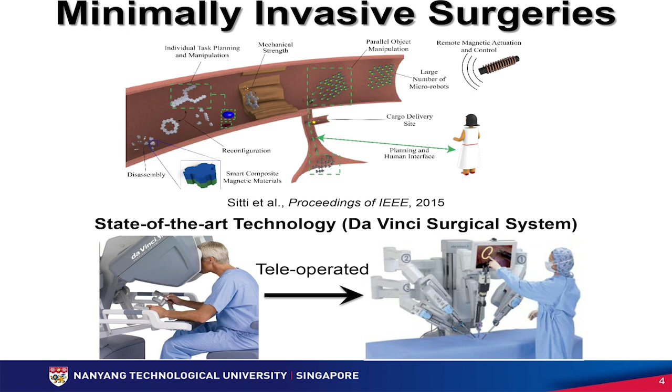A very unique characteristic about this class of robots is that they can utilize their size and mobility to non-invasively access highly confined and enclosed spaces to perform a wide range of micro-nano manipulation tasks. Due to this ability, scientists envision that this technology could one day revolutionize minimally invasive surgeries. The dream is that one day we can inject all these robots into our body, navigate them to a targeted location in a non-invasive way, and perform treatments.

The potential impact of this technology is very significant because if we compare it to the state-of-the-art technologies that use tethered catheters to perform minimally invasive surgeries, the small-scale technology has two distinct critical advantages. Number one, due to the size of the robot and its mobility, the treatments that it can give will be much less invasive. So what does it mean? It means that the patients will experience less pain and they can also recover faster. The entire procedure will also become safer because you reduce the risk of infection and also mechanical trauma.

Point number two, once again, because of the size of the robots and the mobility, they can actually access places that those tethered catheters could not reach, which is why having higher accessibility enables them to create and enable unprecedented new treatments in the future.

So heading towards this goal and dream, many miniature robots have been created in the last decade. In general, we can classify them into two categories, the rigid ones and also the soft ones. After working on this research for many years, I conclude that the rigid ones could only achieve simple rigid body motions and nothing else, which is why I started to look more at the soft robots.

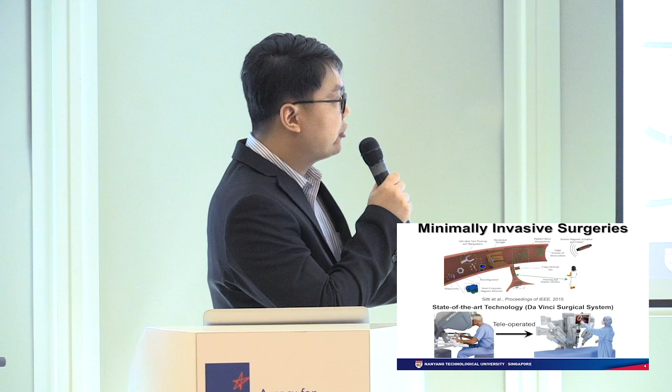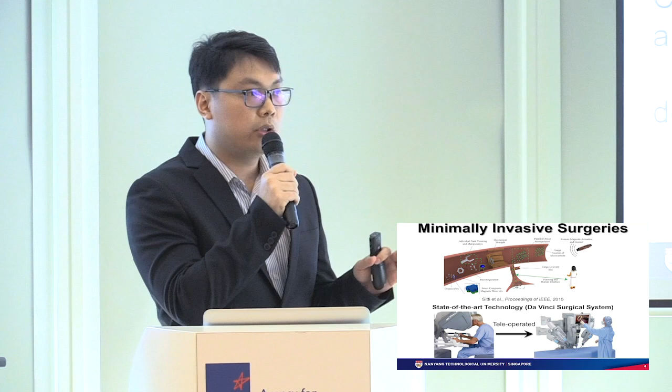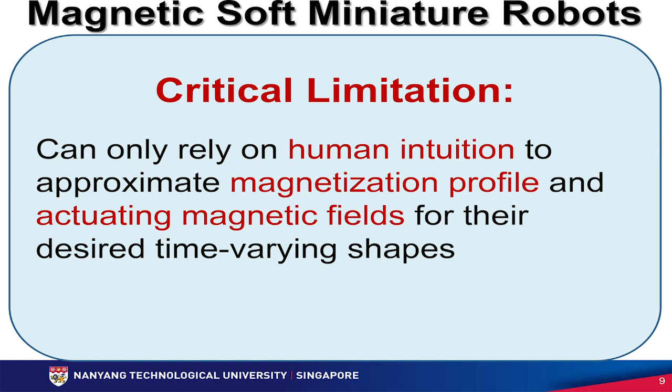Despite the potential of this technology, I need to highlight that there was a very big critical limitation, and that is people could only use their human intuition to guess the required magnetization profile and magnetic fields such that they can create the desired time-varying shapes to achieve certain functionalities.

And this is a very big obstacle if we really want to develop such a technology and translate it for biomedical purposes. And one of the big challenges, why they cannot develop a very systematic way to design and control such robots, is because we don't really understand the physics behind it.

So, in view of all these challenges, I'm going to propose a universal design method. The objective of this method is that if I'm given a series of time-varying shapes, we can use our method to allow computers to automatically generate the required magnetization profile, M, and also the required magnetic fields, B, to control the robots.

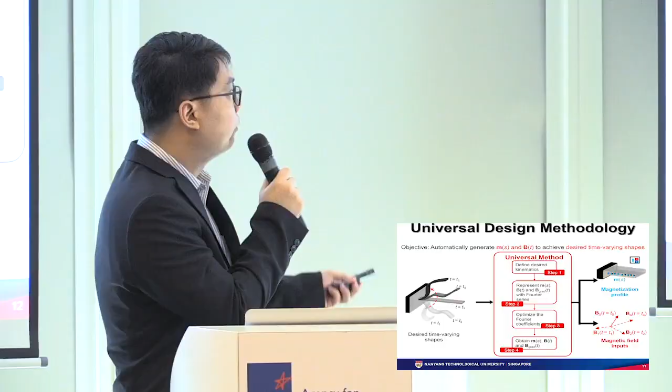So there are 4 steps in this universal method, and I'm going to use a simple beam to illustrate all these 4 steps. We start with step number 1. We are going to first define the desired kinematics, that means what kind of time-varying shapes we want. We can do so by first defining a parameter we call theta, which represents the rotational deflection of the beam at any point in space, S, and also at any time, T.

Once we define theta, we will perform a quasi-static analysis on the beam. To make the analysis generic, we will pick an arbitrary time instant T and an arbitrary infinitesimal small element, and look at all the forces and torques acting on this element. The forces and torques acting at the ends represent the internal forces and torques, while the forces and torque acting on the center represent the magnetic torque and forces respectively.

Once we have drawn all these forces and torques, we will perform a force balance analysis in the x and y axis for this element. We get the expressions shown over here. Next, we use the Euler-Bernoulli equation, relating the bending moment Mb with how the robot is going to deform. Finally, we perform a torque balance equation for this element, and substitute all these three expressions into that equation.

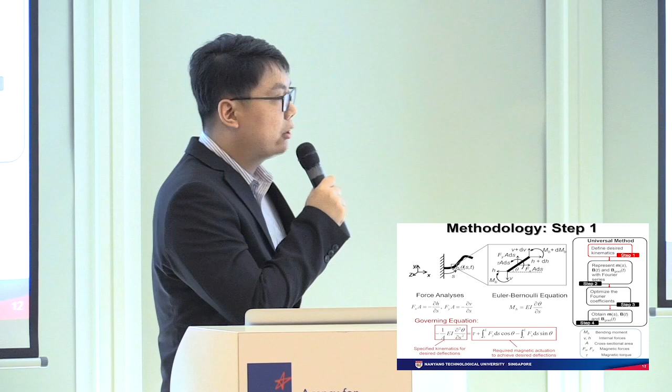What we finally get is a governing equation, the physics that really describes how this technology can work for this beam. There is a physical meaning behind this governing equation. The left-hand side represents the desired kinematics that we want the robot to do, the desired time-varying shapes that we want the robot to create. This is something that we specify.

The right side represents the required magnetic torque and forces that we need to program such that we can balance both sides of the equation. If we are able to balance both sides of the equation, it means that we are able to design and control the robot to achieve its desired functionalities. So this is step number one.

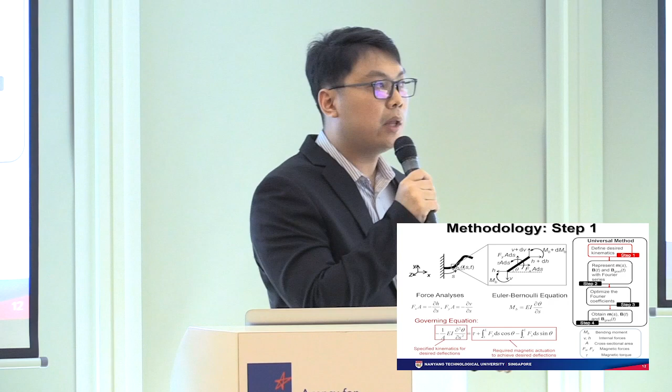Next, we will use this governing equation that I rewrite over here, and move to step number two. Before we do so, I would like to show you the explicit representation of how the magnetic torques and forces relate to the magnetization profile M and the magnetic fields B. Unlike traditional methods that use human intuition to guess M and B, here we are going to use Fourier series to represent M and B first.

The difference between these two Fourier series is that we assume that M, which is the magnetization profile, could only be a function of displacement or space, S, but not time. The reason we do so is because we assume that once the magnet has been magnetized and deployed, we cannot remagnetize it again. On the other hand, B can change across time. That means magnetic field can change across time, but we cannot change it in space because the size of the robot is too small for us to do that. So these are practical constraints that we will consider when we are trying to design and control them.

Nonetheless, despite these constraints, a very significant advantage of using such a representation is that the Fourier series representation includes and encompasses all possible solutions. That is why, if our time-varying shapes that we specify are feasible, we can always substitute such a representation back into the governing equation and balance both sides of the equation by finding the optimum Fourier series coefficients A, B, alpha, and beta. So we will need to go to the next step to show how we do this.

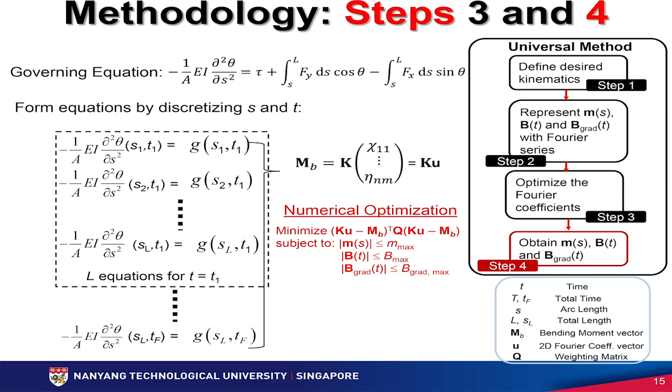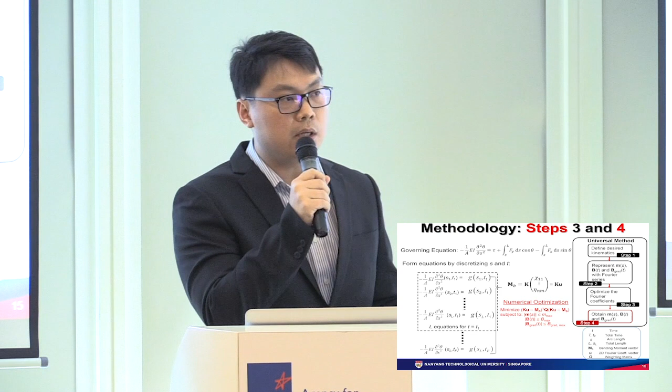So using this format, we'll go to step number 3, whereby we formulate an optimization problem. The aim of this optimization problem is to minimize the differences between the left and right-hand side of the equations by finding the optimum Fourier series coefficients. We also make some constraints because of practical reasons. We say what is the maximum amount of magnetic field we can supply to control our robot. So once we specify this optimization problem, we allow computers to automatically generate the required Fourier series coefficients. And this will in turn give us the required M, the magnetization profile, to design our robots, and also B, the required magnetic fields to control them.

So using this method, we have synthesized and created multiple miniature soft robots. But because of time constraints, I'm just going to show two examples. The first device is called the artificial cilium. A biological cilium is a hair-like structure that can be found on a microorganism. It can generate a very complex beating pattern that can be divided into two strokes, the recovery strokes and the power strokes. Due to this amazing beating pattern, many scientists and engineers have tried to create an artificial cilium device that can create such beating patterns. But this was really challenging, and even after many decades, people have achieved very little success.

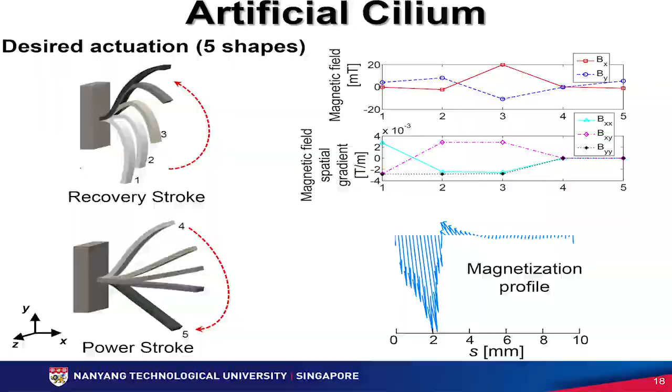Nonetheless, using our method, we can automatically ask the computers to generate the required magnetization profile for the robot, and also the required magnetic fields to actuate them. Based on all these parameters, we were able to design, construct, and test such devices. Before I show you the videos, I just want to highlight that the profile and the magnetic fields are highly complex. This is something that you cannot really use human intuition to guess, right? This is not simple. But anyhow, based on all these parameters, this is what we have.

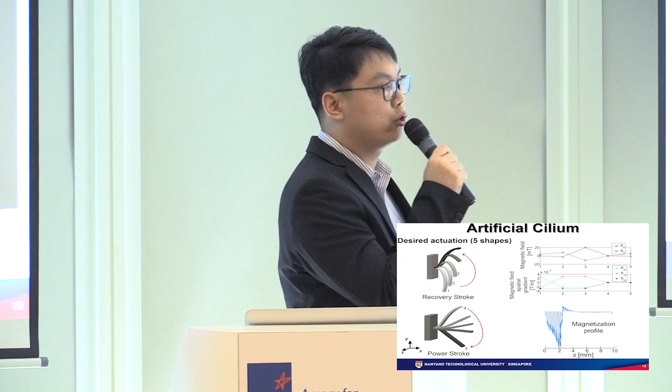First, I'm going to show you the beating pattern of a biological cilium in a very simple animation. So first, this is the power stroke, and then the recovery stroke. This is what we can build and control. Power stroke and recovery stroke. Power stroke and recovery stroke.

While this device still could not 100% mimic how a biological cilium behaves, I want to highlight this: to my best knowledge, this is already the best artificial cilium that has been created to date.

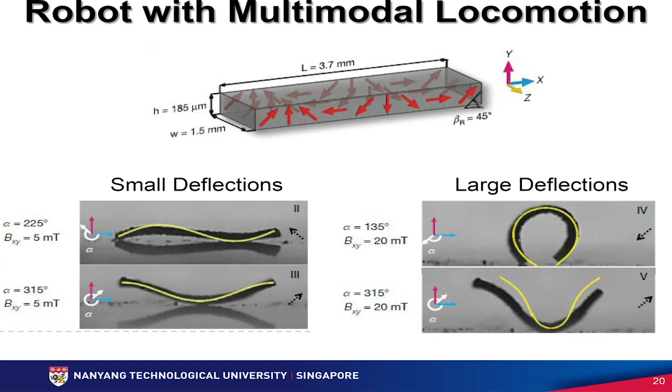All right? The second example is that we have built a miniature soft robot that can create 7 different types of locomotion. To enable all modes of locomotion, we want the robot to be able to create 4 principal shapes, as shown over here. They can be divided into 2 categories, the small deflection ones and the large deflection ones. For the small deflection ones, we want the robot to create a sine shape and a cosine shape. And because the deflections are small here, we can superimpose these 2 shapes if necessary. This is very beneficial if you want to create a swimming locomotion like the Taylor swimming sheet.

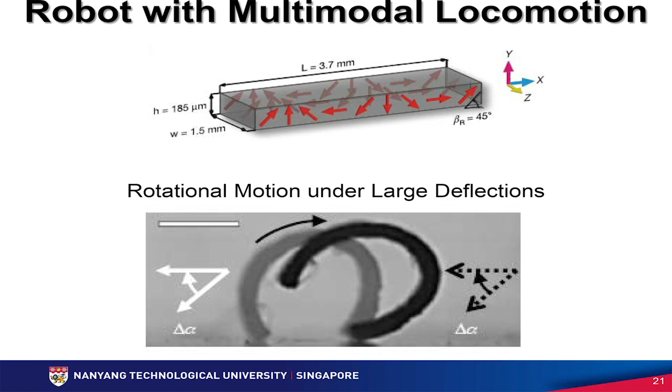On the other hand, when we want the robot to create large deflections, we want it to be able to create a C and a V shape, all right? Under such a configuration, we can control the rotational displacement or the angular displacement of the robot. So using all these 4 shapes, we can enable 7 locomotions. This is the video.

And once it's on top, it can reach the water surface, all right? The video is slow because just now it was slowed down by 80 times. Now it's slowed by 17 times, all right? The same robot could also climb a meniscus. It can do so by deforming itself into a C shape to enhance its buoyancy. Once it's at the interface of land and water, we can use the rolling locomotion to allow it to land on solid terrain. On land, we can use another locomotion if we want to precisely locate its position. This is a locomotion that we call walking.

But if walking is not possible because it's been blocked by a big obstacle, we can change the walking locomotion into a jumping one. Yeah. No, it's on land. The whole thing is on land. So after we jump across, we can resume our walking locomotion, right?

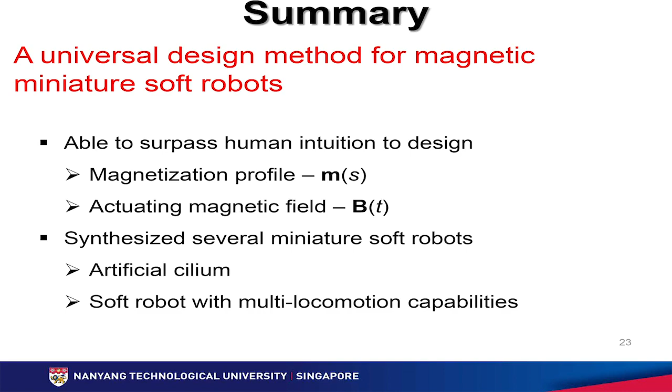So, in summary, in this talk, I've shared with you a universal design method for magnetic miniature soft robots. I believe this method has allowed us to fully capitalize on the potential of this technology, which is why I believe this is a significant step towards translating this technology for future biomedical applications, especially minimally invasive surgeries. While we are still far away from realizing those applications, we can see the potential of this technology through these two showcases, especially the artificial cilium, which people have tried for many decades with little success, and also a soft robot that has 7 different types of locomotion.